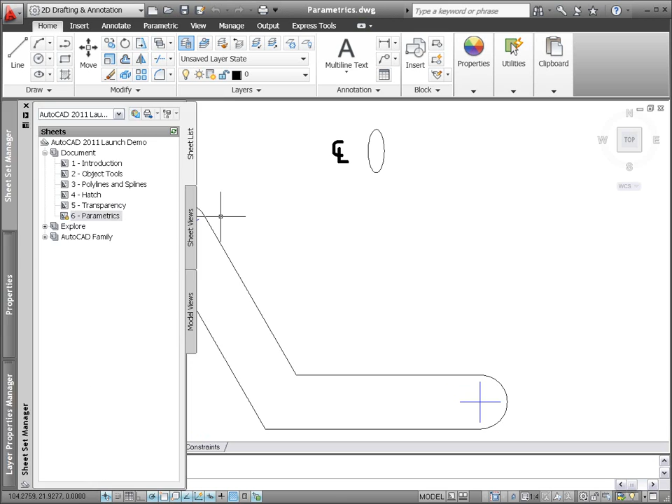2D parametric functionality has been enhanced in AutoCAD 2011, making geometric and dimensional constraints even easier to use. The Auto Constrain tool, which enables you to automatically apply geometric constraints, is updated to include the equal constraint.

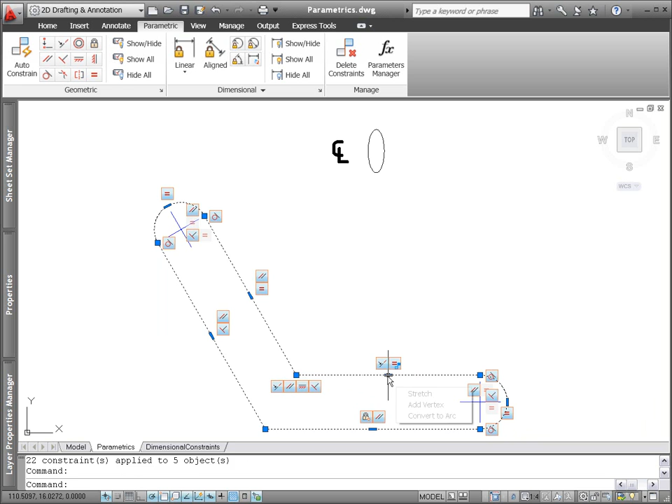A new Infer Constraints control on the status bar automatically infers and applies geometric constraints as you create and edit geometry. For example, if you draw a rectangle without inferred constraints, it's nothing more than a four-sided polyline. When you edit a vertex, it loses its shape.

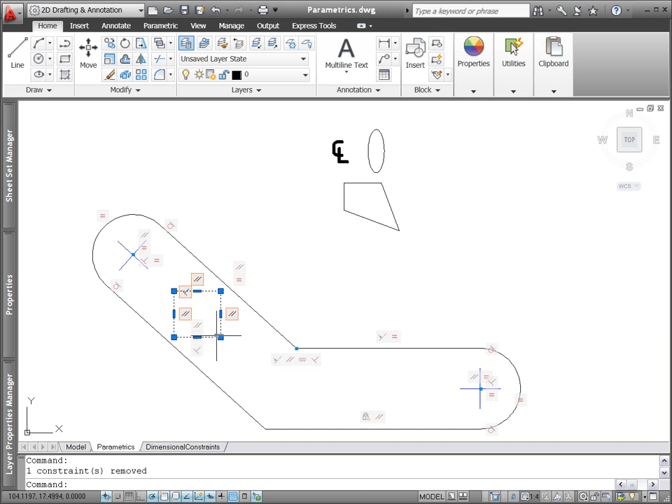If you draw a rectangle with inferred constraints, it automatically behaves as a rectangle should, maintaining parallelism and perpendicularity. You can individually remove any inferred constraints that you don't want, or apply additional constraints as needed.

When you draw with object snaps, such as creating a circle at the center of an arc, inferred constraints ensure those points maintain their relationship. If the circle moves, so does the arc. Enjoy the same automated behavior when editing geometry with object snaps.

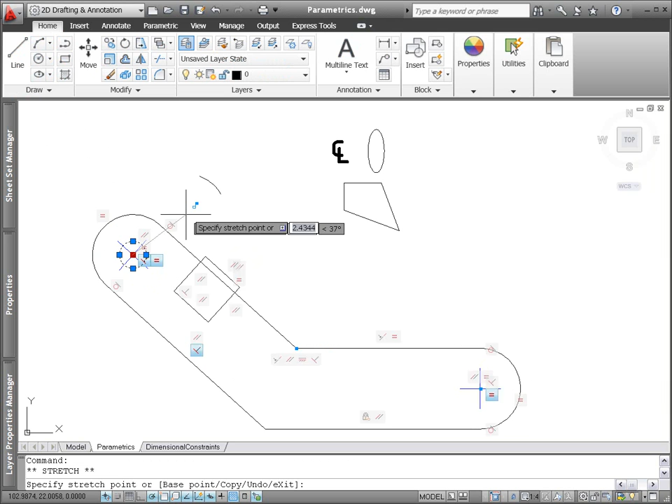For example, copying the circle to the center object snap of an arc infers a coincident constraint just like drawing the circle did. In addition to creating point-to-point coincident constraints with specific object snap points, you can use the nearest object snap to apply a coincident constraint between a point and an object.

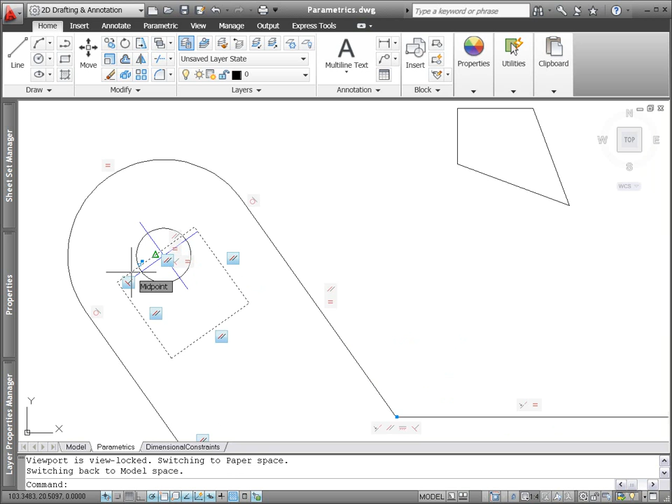For example, if you move the midpoint of the rectangle to the nearest object snap of the center line, the rectangle has the flexibility of moving anywhere along the center line, including its virtual extension. Inferred constraints also apply to fillets and chamfers. Creating a fillet, for example, automatically applies tangent constraints between the arc and line segments.

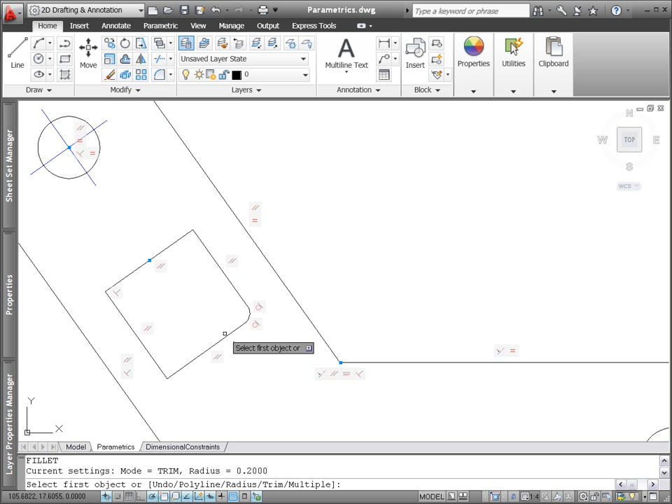AutoCAD 2011 provides improved parametric support for ellipse and text objects. You can now apply parallel, perpendicular, collinear, horizontal, or vertical constraints between the major or minor axis of an ellipse and other objects. Similarly, you can apply these geometric constraints to text objects.

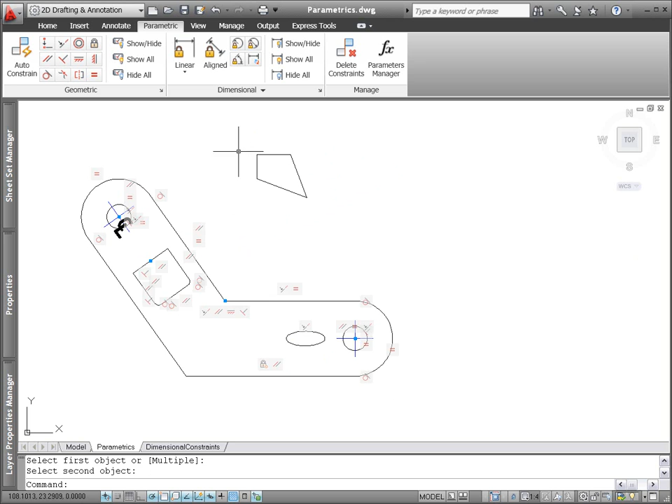In addition to the enhanced geometric constraint functionality, AutoCAD 2011 offers enhancements to dimensional constraints. When entering dimensional constraint values in place, you can click on an existing dimensional constraint to insert the constraint name. If a dynamic dimensional constraint references another parameter, an fx is included in the parameter name to alert you that it's dependent on other values.

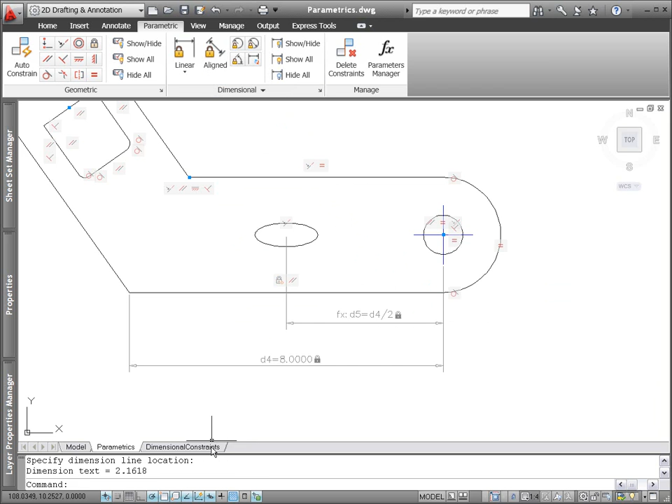New tools on the dimensional panel provide you with more control over the display of dimensional constraints. Using the Show Hide tool, you can select the specific dimensional constraints you want to show or hide.

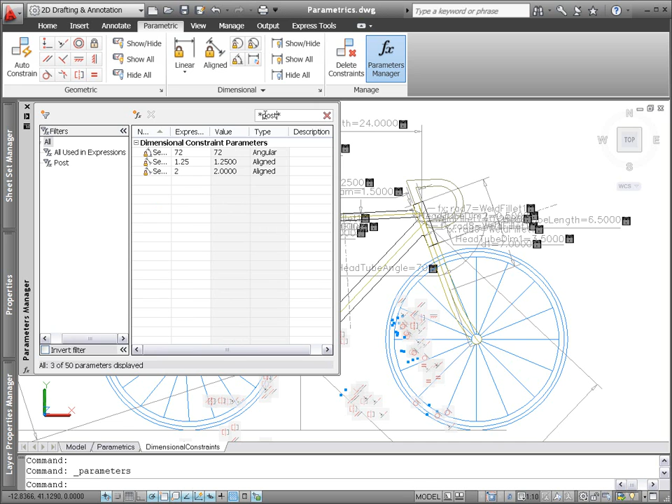For those drawings with many dimensional constraints, you can organize them into filter groups using the Parameters Manager. Create new filter groups and then drag and drop parameters from the list into an appropriate group. A new search tool enables you to easily find parameters with a specific name.